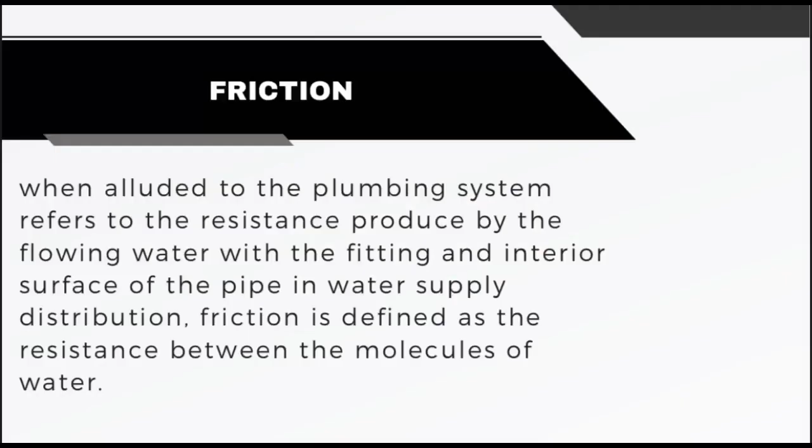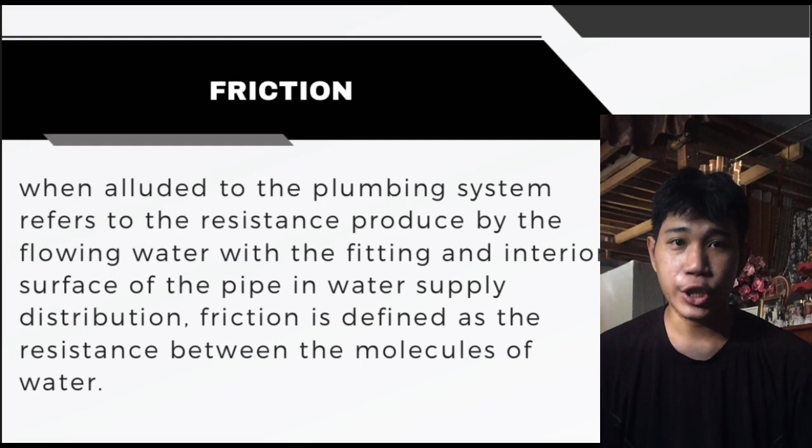In friction, we allude to the plumbing system, referring to the resistance produced by the flowing water with the fitting and interior surface of the pipe in water supply distribution. Friction is defined as the resistance between the molecules of water.

Friction in water supply and distribution system can be minimized under the following conditions. So we have these 5 conditions. First, all water pipes should be installed straight and direct as possible. Second, the use of turns, offsets, and traps should be minimized if they cannot be avoided.

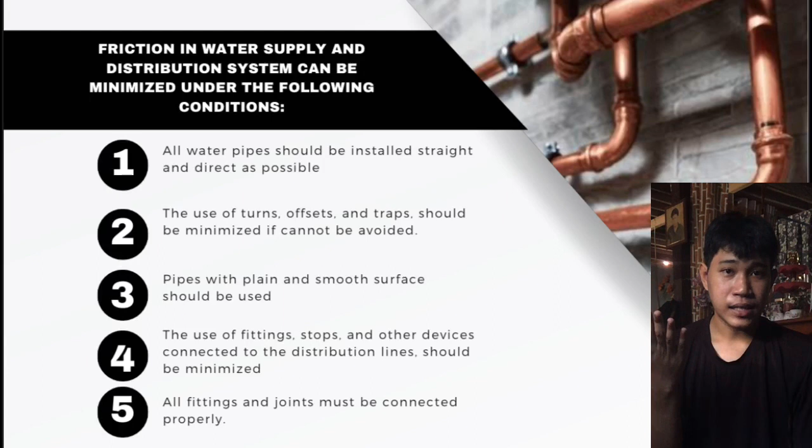Third, pipe with plain and smooth surface should be used. Fourth, the use of fittings, stops, and other devices connected to the distribution line should be minimized. And lastly, fifth, all fittings and joints must be connected properly.

Pressure. In plumbing, pressure is the force required to move the water inside the pipe. It is the only means necessary to overcome friction. The pressure exerted by the water at rest is called static pressure. The pressure exerted by the water in the base of a service pipe when the water is not in motion is one example of the static pressure.

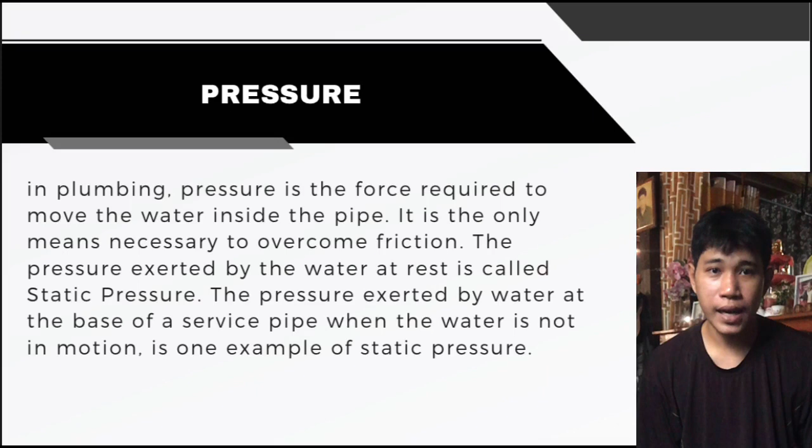The normal pressure refers to the pressure range measured over a period of 24 hours. Normal pressure for a residential house ranges from 30 to 40 psi. Lower than this may result in insufficient flow of water, especially during the simultaneous use of the fixtures. On the other hand, water pressure greater than 50 psi may cause hammering of pipe joints.

An excessive water pressure can be minimized by installing a pressure reducing valve. This valve will keep pressure constant at 40 psi or can be reset to any other pressure desired. Water vibration and hammering can be checked by installing an air chamber pipe at the back of the faucet. The compressed air inside the pipe chamber serves as cushion to prevent water hammering.

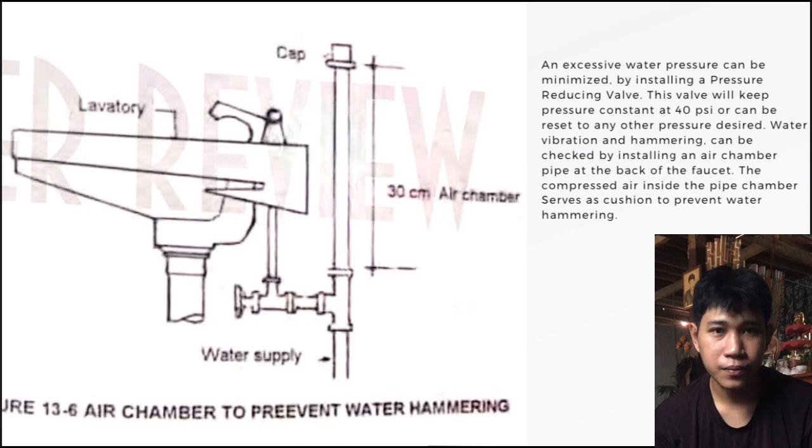So we have this called critical pressure, referring to the maximum and minimum pressure at which proper function of the water supply can be maintained. Next is the head loss by friction, or friction head loss, which is the loss in the rate of flow due to the friction between the water and the wall of the pipe.

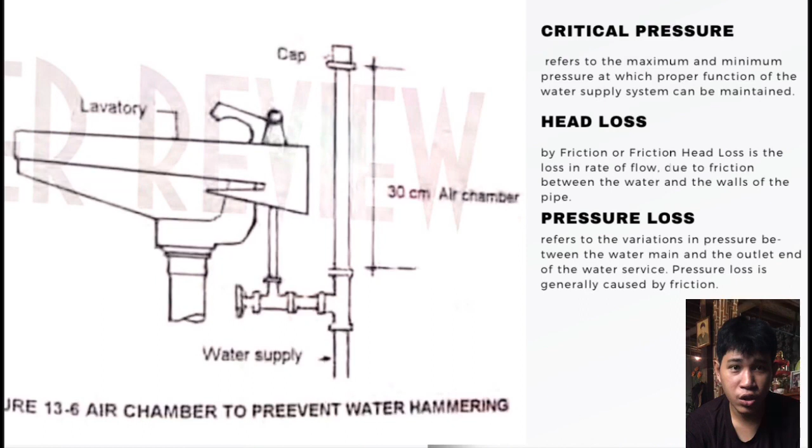Last is the pressure loss, referring to the variation in pressure between the water main and the outlet end of the water service. Pressure loss is generally caused by friction. These are the other causes of pressure loss. One is the simultaneous draw or use of water.

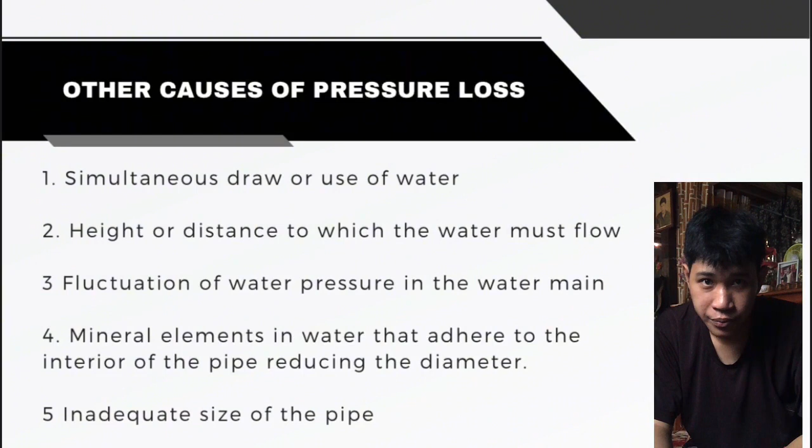2. Height or distance to which the water must flow. 3. Fluctuation of water pressure in the water main. 4. Mineral elements in water that adhere to the interior of the pipe, reducing the diameter. 5. Inadequate size of the pipe.

So, the water supply coming from the public water main is also affected by water pressure fluctuation caused by peak load, emergency draw, breakdown of lines or pumping unit, and insufficient water level at the water system reservoir.

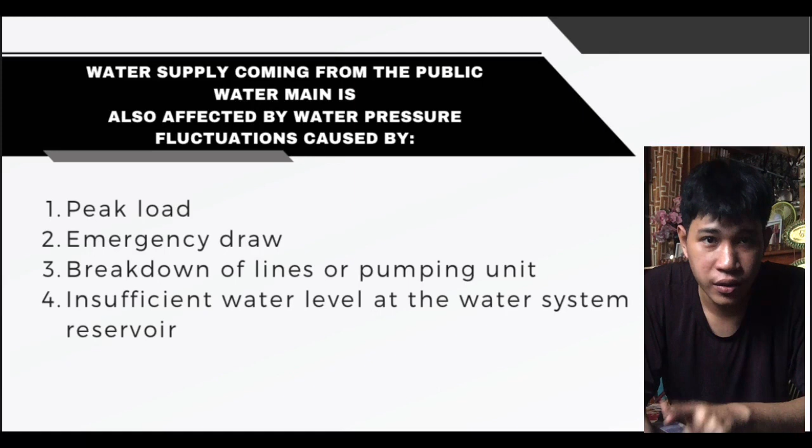And now let us discuss the maximum and probable demand. The maximum demand refers to the maximum water discharge of fixtures in terms of fixture units. The maximum demand of water is equal to the total fixture units in a plumbing system, where 1 unit is valued at 8 gallons of water discharged per minute interval.

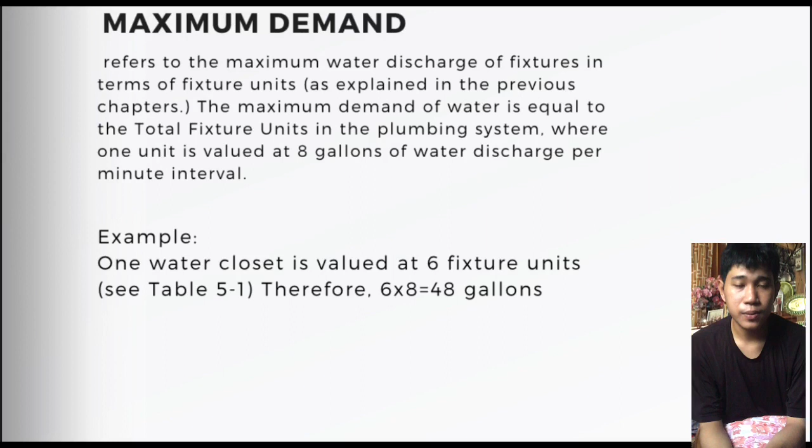So we have this one example here. One water closet is valued at 6 fixture units. Therefore, 6 times 8 is equal to 48 gallons. So we have here another example. A residential house has 3 water closets, 3 lavatories, 1 kitchen sink, and 3 shower baths.

Determine the maximum demand of water. First, solve for the total fixture units using table 5.1. So we have here 6 units times 3 water closets equal 18 units. 1 unit times 3 lavatories, we have the 3 units.

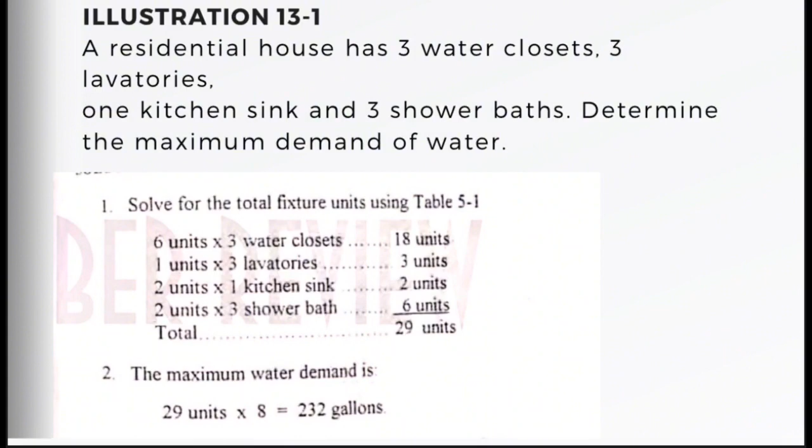2 units times 1 kitchen sink, we have these 2 units. 2 units times 3 shower baths, we have these 6 units. For the total of 29 units. Next is the maximum water demand. According to what we discussed earlier, in 1 unit we have 8 gallons. So, for the total of 29 units times 8 gallons, we have 232 gallons.

In probable demand or peak load, this is one factor to be considered in determining the size of the water service pipe. The question of how many fixtures will be used simultaneously at one point in time is difficult to ascertain, but according to the statistical survey, the fewer the number of fixtures installed, the higher the percentage of the probability of their simultaneous use, and the greater the number of fixtures installed, the lower the percentage of probable simultaneous use.

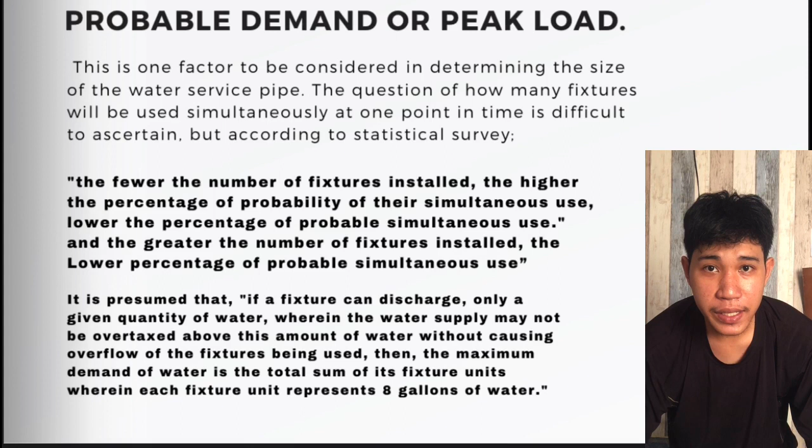It is presumed that if a fixture can discharge only a given quantity of water, wherein the water supply may not be overtaxed above this amount of water without causing overflow of the fixture being used, then the maximum demand of the water is the total sum of its fixture units, wherein each fixture unit represents 8 gallons of water. And now, let us explain the probability of simultaneous use of fixtures.

As you can see on the table, we have the number of fixture units and the percentage of simultaneous use. In fixture units, we have 1 to 5 units, 6 to 50 units, and 51 or more units. The percentage of simultaneous use is 50 to 100% for 1 to 5 units, 25 to 50% for 6 to 50 units, and 10 to 25% for 51 or more units.

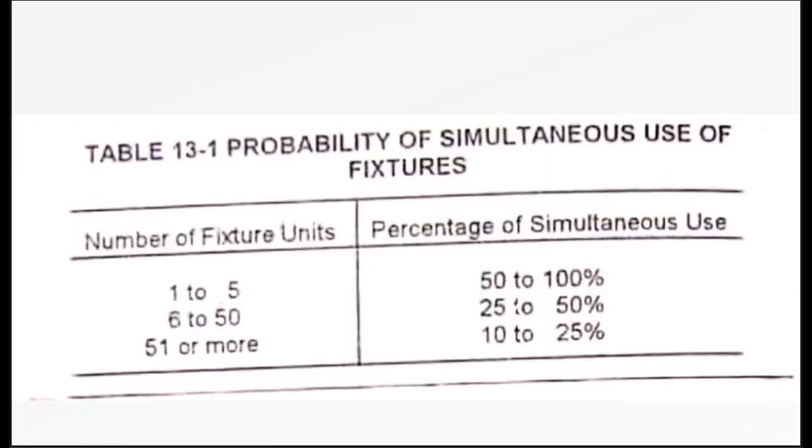The probable demand is not likely to exceed 25% of the maximum demand, especially for an average size residential building. This figure may be used to establish the size of the water service pipe. So we have here one example for probable demand. Determine the probable demand of the following fixtures installed: 2 water closets, 1 lavatory, 1 bathtub, 1 shower bath, and 1 kitchen sink.

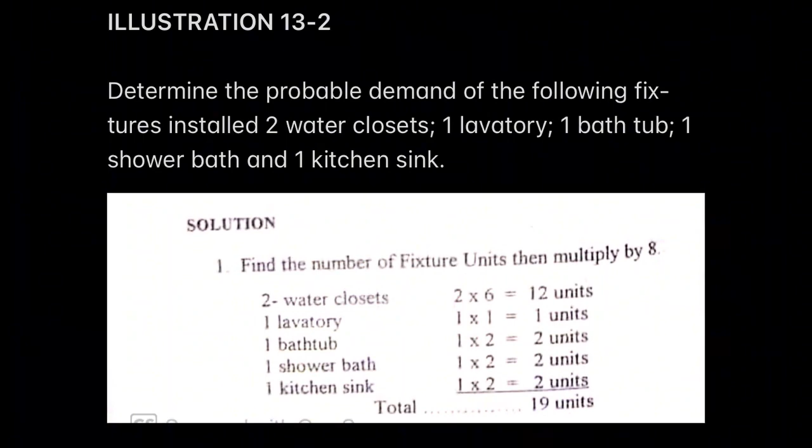In our solution, first find the number of fixture units, then multiply by 8. Given 2 water closets, 2 times 6 is equal to 12 units. 1 lavatory, 1 times 1 is 1 unit. 1 bathtub, 1 times 2 is 2 units. 1 shower bath is 1 times 2 equal 2 units. And 1 kitchen sink, 1 times 2 equal 2 units. For the total of 19 units.

Second, we multiply by 8. 19 units times 8 gallons equal 152 gallons. That's the maximum demand. Third, the 152 gallons maximum demand is not likely to be consumed in 1 minute, thus it may be reduced by 25% to 50% to get the probable demand. Fourth, the assumed 30% reduction of 152 gallons equals 45 gallons. Lastly, subtract from the maximum demand: 152 gallons minus 45 is equal to 107 gallons.